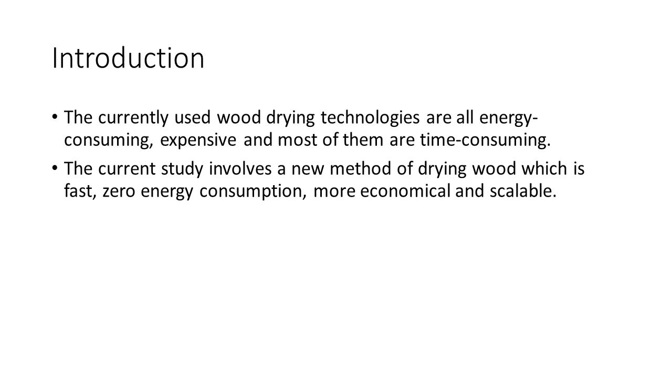It's well known that currently used wood drying technologies are all energy consuming, expensive, and most of them are time consuming. The current study involves a new method of drying wood which is fast, zero energy consumption, more economic, and scalable. The method involves dehumidification of wood using a drying agent.

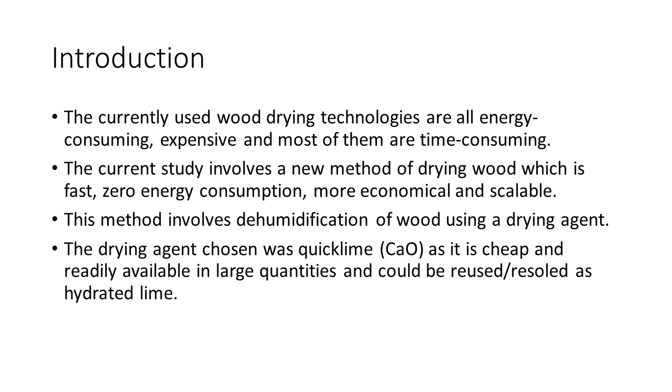The drying agent chosen was quicklime, calcium oxide, as it is cheap, readily available in large quantities, and could be reused or resold as hydrated lime.

The wood used within the study was Casuarina glauca, or the she oak wood, as this was farmed on wastewater and available in its green state.

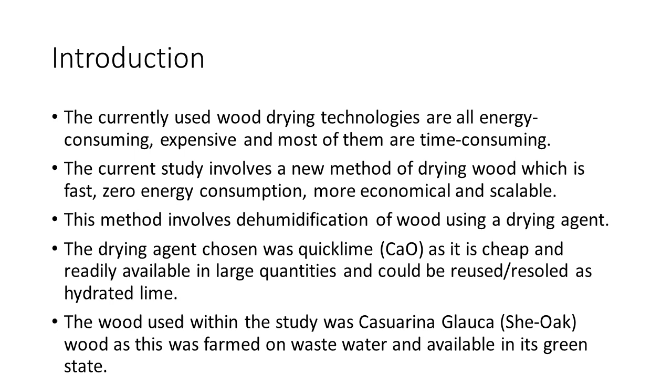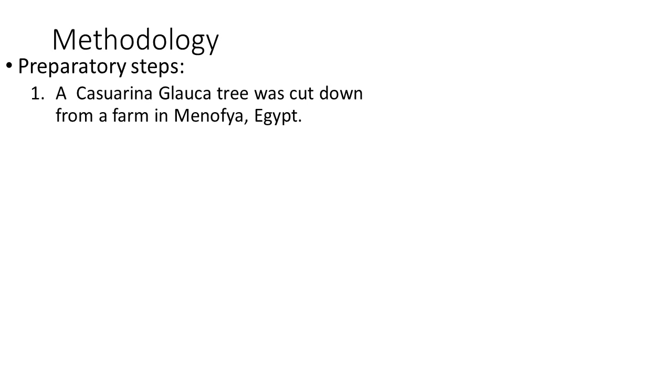So the methodology: first some preparatory steps are done. The Casuarina glauca tree was cut down, and the lumber was sawed into equal sized planks for testing. Simultaneously, the quicklime was bought and crushed.

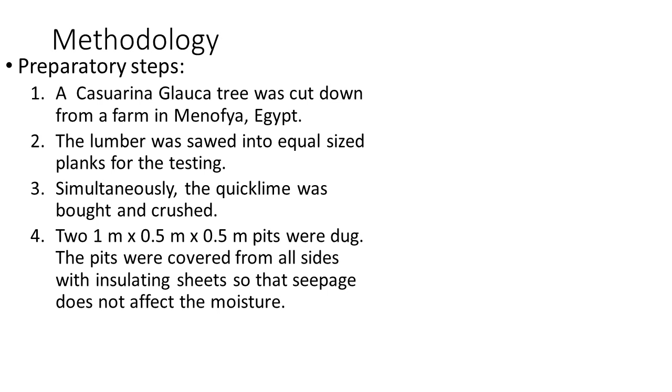Two pits, each 1 meter by 0.5 meters by 0.5 meters, were dug. The pits were covered from all sides with insulating sheets so that seepage does not affect the moisture, as shown here, and the wood was buried in the quicklime. This process was done several times.

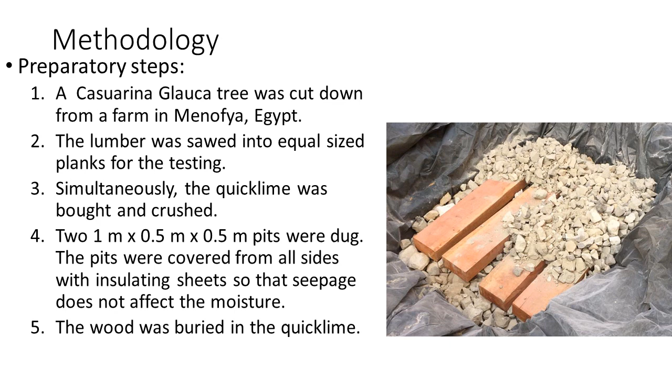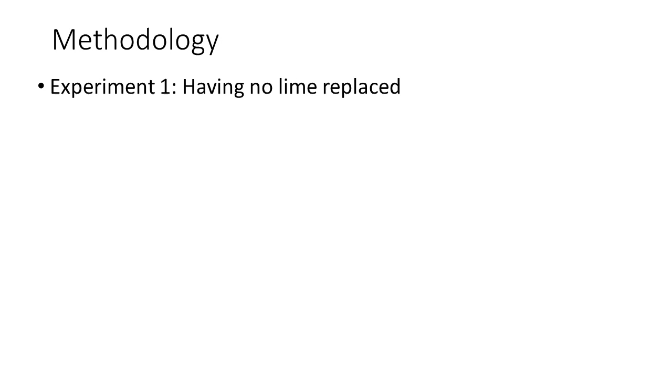The first two sets of pits were done with no lime replaced during the time of the experiment. First the initial water content was measured before burying. Then, within one pit, one plank of wood was buried and surrounded with quicklime. Within the second pit, four planks were buried together.

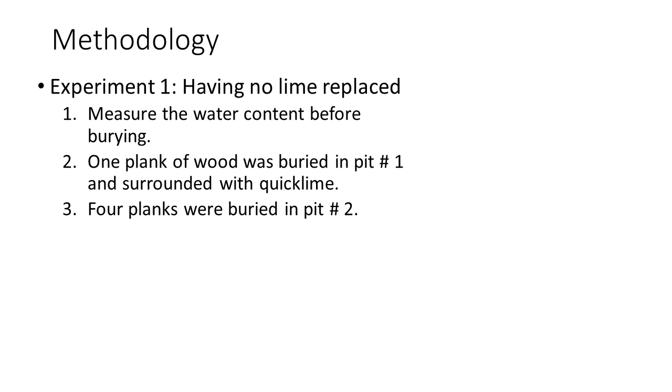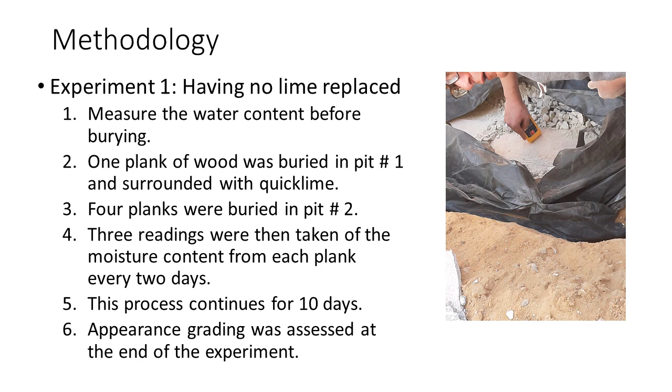Three readings were taken from each pit plank, from its top, bottom, and middle, every 2 days, and this process continued for 10 days. Appearance grading was assessed at the end of the experiment, done according to the European standards.

However, for the second set of samples, the same experiment was done, with one simple exception: the lime was replaced after 5 days from the beginning, at the middle of the 10-day experiment. The lime was replaced with new quicklime, and you will see the effect is noticeable.

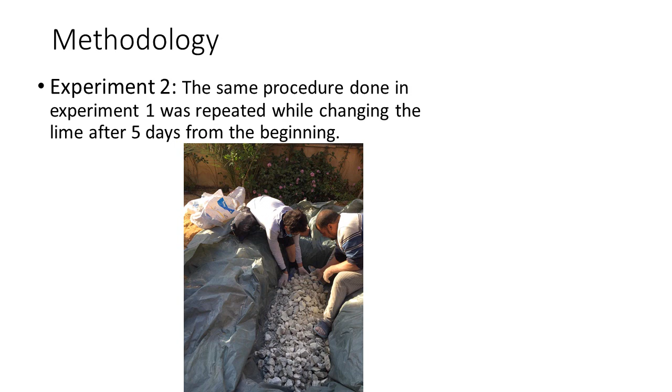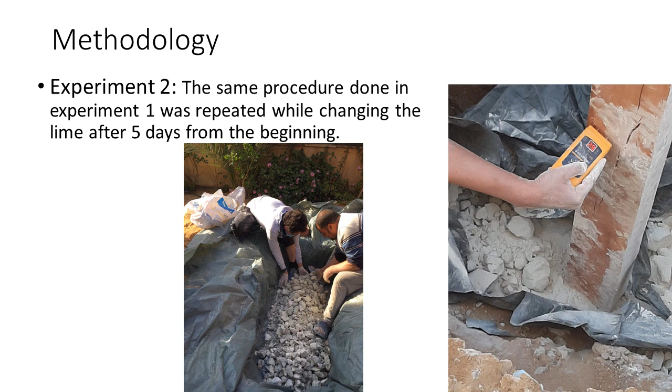The same process was repeated, meaning the same process of measuring the moisture of the wood was done using the same apparatus.

The results for experiment one, which had no lime replacement: when you look at the single plank versus four planks per pit, the difference between the two sets of curves was not large. In both sides, whether left-hand or right-hand, the measurement didn't have a noticeable difference. The moisture stayed around 20% at the 10th day, whether for the single plank or the four planks. So this is more or less the same.

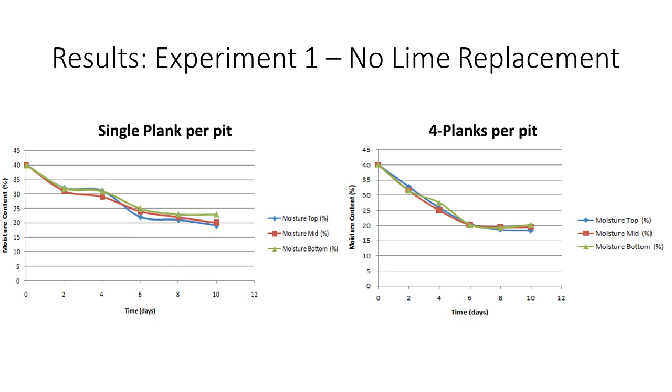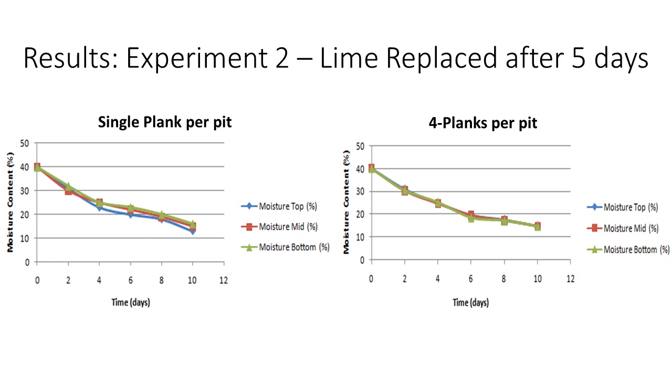However, comparing this to replacing the lime after 5 days, there is a major difference here when it comes to the moisture at the 10th day. After replacing the lime, it's as if the new lime is able to absorb more humidity from the wooden planks, achieving a lower moisture content within the wood. So here the moisture content, instead of being 20% on the 10th day, became maybe around 15%.

This is even more apparent when comparing the data. The raw wood control was 40% moisture. The experiment with no lime replacement, experiment 1, played between 17 and 19%. However, the ones with lime replacement are mainly significantly less, playing between 13 and 14% moisture.

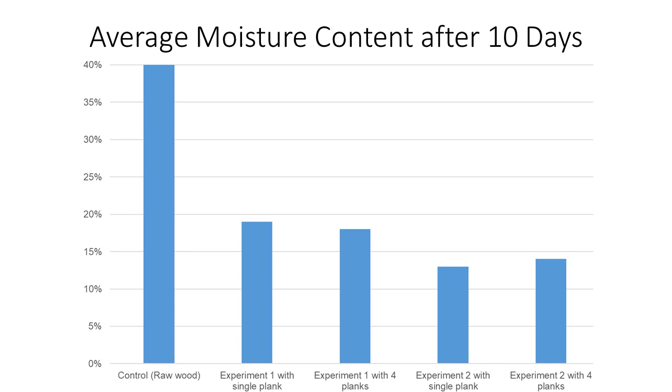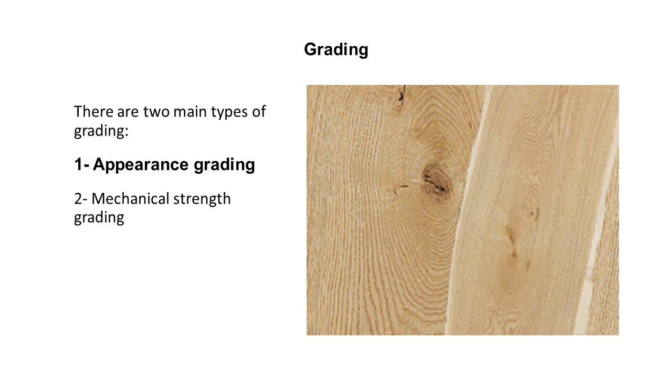So let's move on to the grading. What's the effect of having lime on the grading, and what's the effect of replacing the lime on the 5th day on the grading? So what we are doing here is what we call appearance grading, because we didn't have access to the labs due to COVID-19. So appearance grading was performed according to the European standards.

So the first character is Q, which stands for oak. The second character could be B, S, F, or P, depending on the type of product. In our case it's B because it is beams, and P stands for planks. However, whether planks or beams, it's the same thing. Then the last character depends on the quality of the grade. If it's exceptional quality, it's an A. In decreasing order, it's 1, 2, 3, 4.

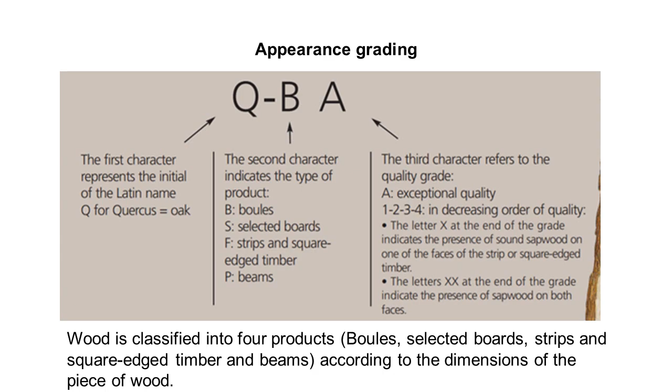If it has major defects, you'll have an X or two X's. So only features distributed across the entire piece are considered, except for dead knots, the maximum number of which is determined per linear meter. According to the European standards for grading, the beams we had in this experiment were ranging between QPA and QP2.

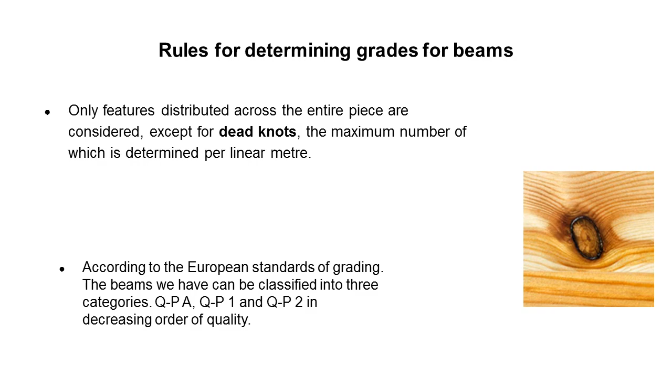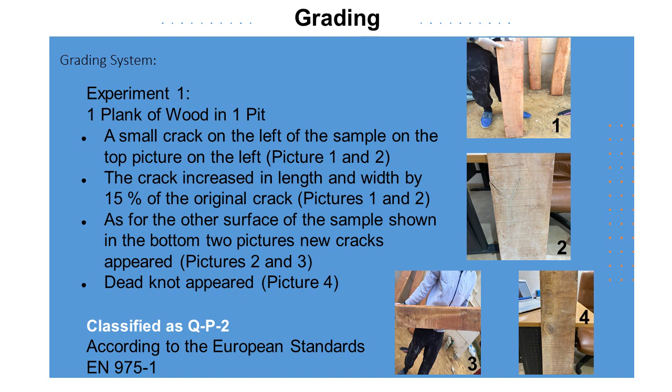So for raw wood, it was apparent that it was QPA. However, within experiment 1, within one plank of wood in one pit, it was found that we had some cracks, some significant cracking that caused us to say it was QP2. For the 4 planks of wood in one pit, again within experiment 1 - which means having no lime being replaced - this is again QP2. So having no lime being replaced within the experiment, this caused having a QP2 grade.

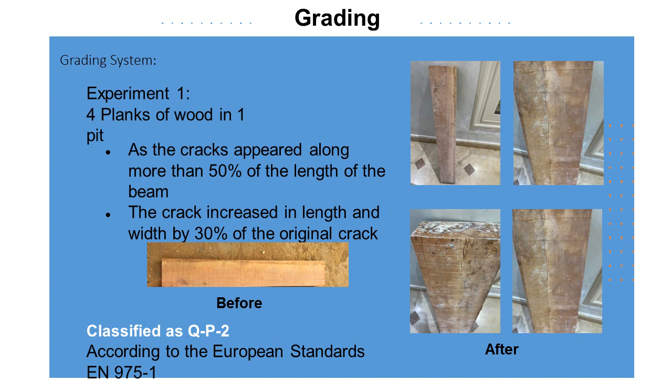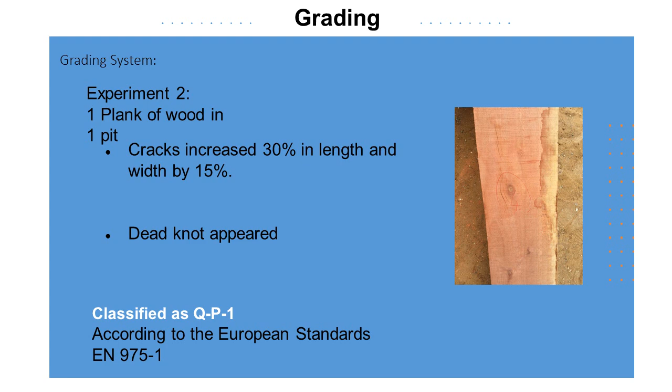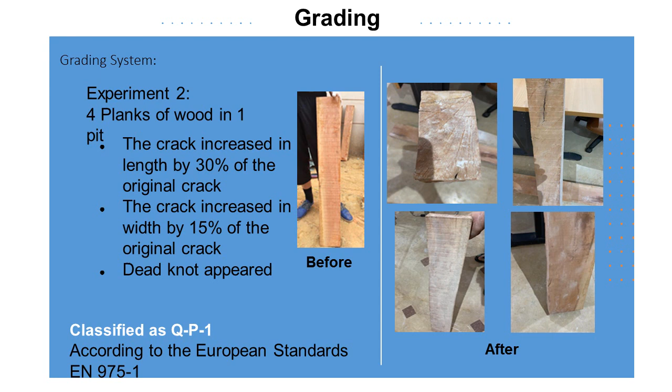Replacing the lime on the 5th day enhanced the classification a little bit. So instead of having it as QP2, now the degree of cracking was not as significant as before, and it was QP1. This is applicable whether it's 1 plank of wood or 4 planks of wood in one pit. Here the degrees of the cracks are not as severe as the case when lime is not replaced. So it seems that lime being replaced did not only improve the moisture content, it also improved the quality of the end product.

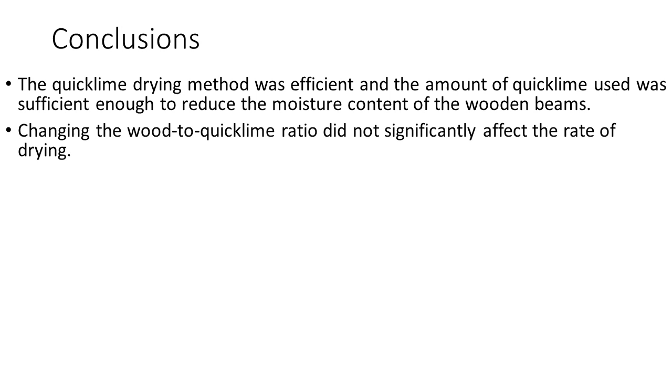So in conclusion, we could say that the quicklime drying method was efficient, and the amount of quicklime used was sufficient to reduce the moisture content of the wooden beams. Changing the wood to quicklime ratio did not significantly affect the rate of drying. Replacing the quicklime after half of the duration of the experiment, on the 5th day, yielded excellent improvements with a lower final moisture content, a faster rate of decrease of moisture content, and a better appearance grade of QP1.

According to the European standards, the quicklime method required extremely less time than air drying, at a slightly higher cost, when compared to air drying. However, it resulted in wood with a worse grade quality by 1 grade, but still acceptable, with a lower final moisture content - again, all compared to air drying. However, it's of course not comparable to vacuum drying or any other energy-consuming and cost-consuming drying method. So here you are comparing it to something comparable to it, which is air drying.

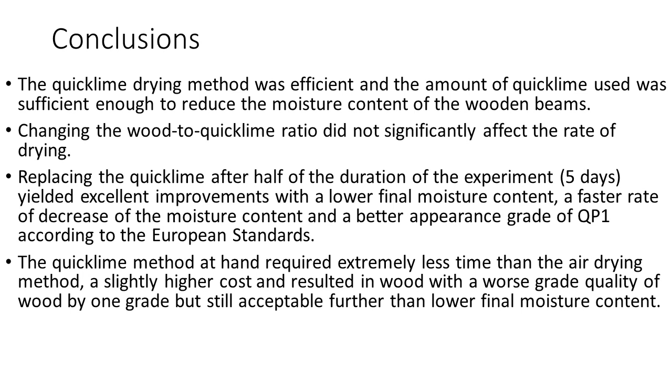But again, air drying could take months, so you are losing time, which translates to money. When comparing it to kiln drying, it has significantly lower cost and energy consumption and carbon footprint, and it has a better quality product in general and a lower final moisture content.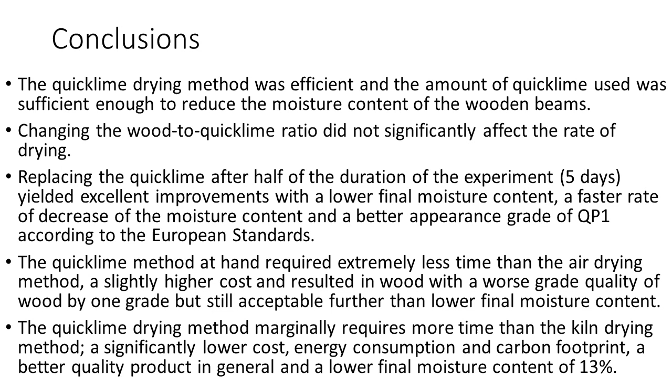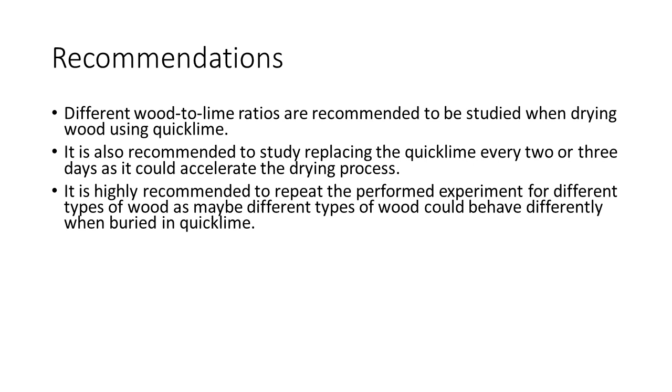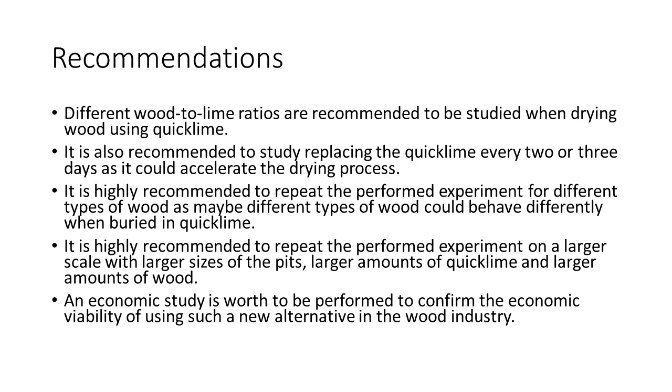It is recommended to study different wood to lime ratios, and it's also recommended to study replacing quicklime every 2 or 3 days. It's highly recommended to repeat the experiment for different types of wood and on larger scales. An economic study is also worth performing to confirm the economic viability of the technique.